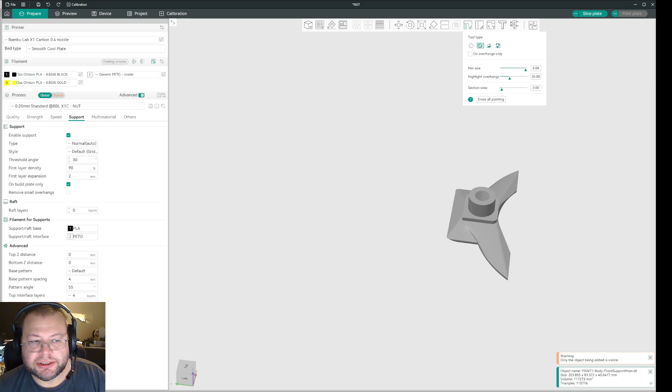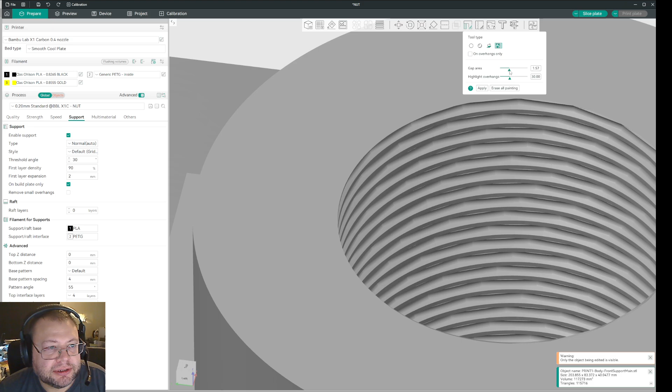Just wanted to show you a little bit, because you have a button here called gap fill, and this will basically try to detect gaps, or as you can tell from the icon, probably triangles, and it will usually do this by trying to find something that corresponds with those values, but that's not what I primarily was going to show you.

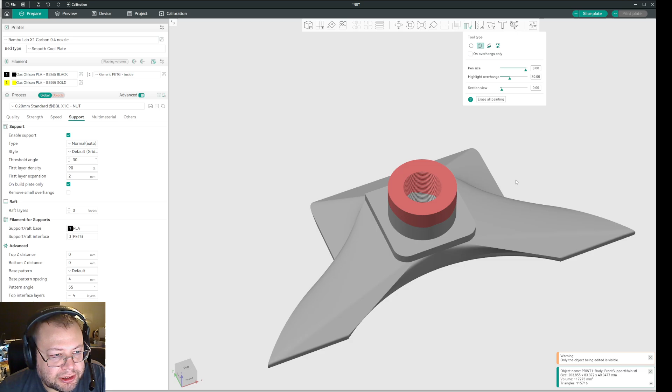I sort of made my paint process a little bit faster. So I use sphere and I put it on max, and right click is block everything. So I start with that as a point. I just go in and I paint the whole model as a block with the sphere tool.

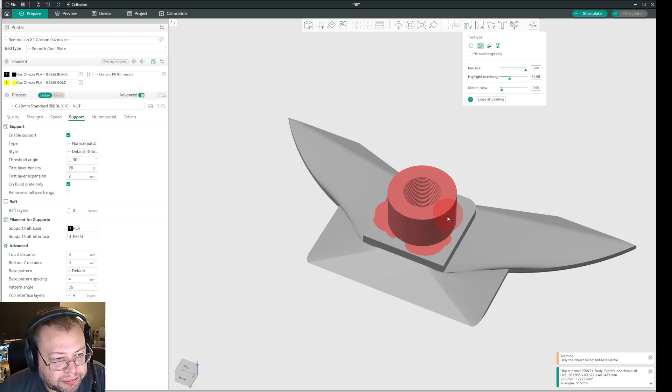Especially on models where you have threads, it is a quick way to do it. See? So now I have effectively blocked all supports inside the threads. I'm just gonna paint the whole model with block support. See? Because I'm using this sphere tool, it will do every crevice and stuff like that as well. Here.

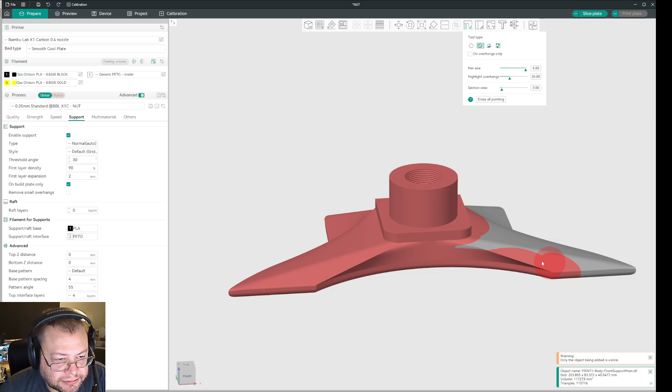The reason I'm doing this is because it's so much easier afterwards to just paint where you want the supports, and everything else will have basically block support on them. So if you at any point want to flip it or whatever, then you don't have to worry about painting blocks of support. And the green you can see here is actually the surface that is basically touching the build plate.

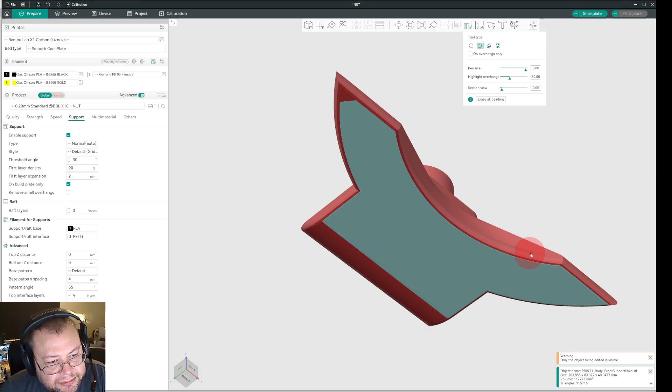I think we are getting close to the final. Okay, so there I have painted the whole thing with block support. For me that is ideal because I don't end up with random supports coming here or here, since I know it can print properly.

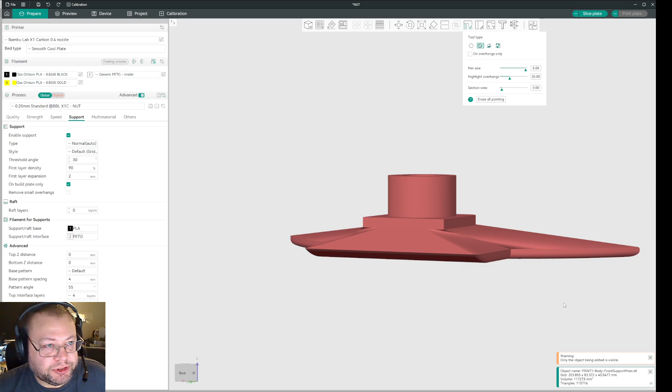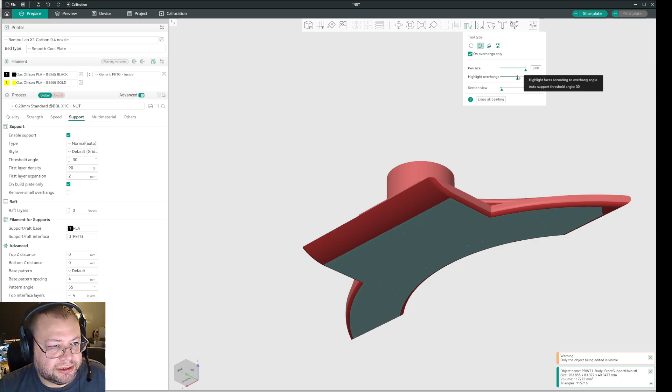So after I'm done with that, I click to the fill tool and overhang support, or I can just use the sphere tool still, and I can just leave the pen size up, it's not a problem, and then I just reduce and I increase the support until I reach the desired height. I want it to support up to there. I'm looking at the bottom part here now.

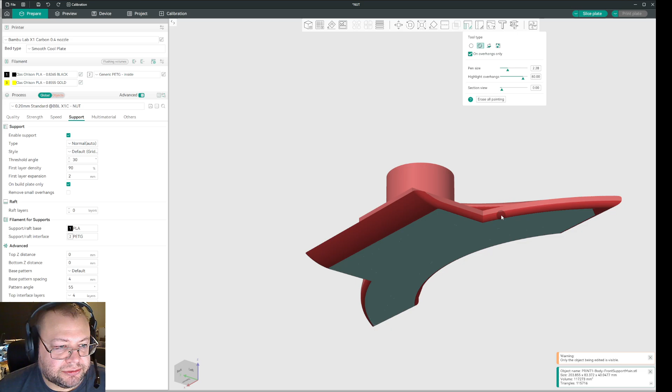Okay, so I'll reduce the size of my sphere so I'm not accidentally drawing anything else. So now I have it set to overhangs, and the sphere is roughly the size of my object here, and I think I'll reduce the overhang a little bit because I don't want to reach the top there.

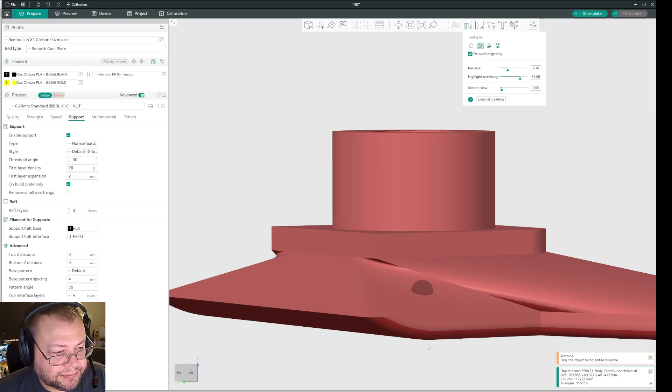You see, how far can I go? I think there should be fine actually. There, I think that's fine. I'm pretty sure it's able to print that. Okay, so now I have selected the areas here, so I'll just start painting, and I have it selected on overhang, so it doesn't matter if I paint the other pink parts.

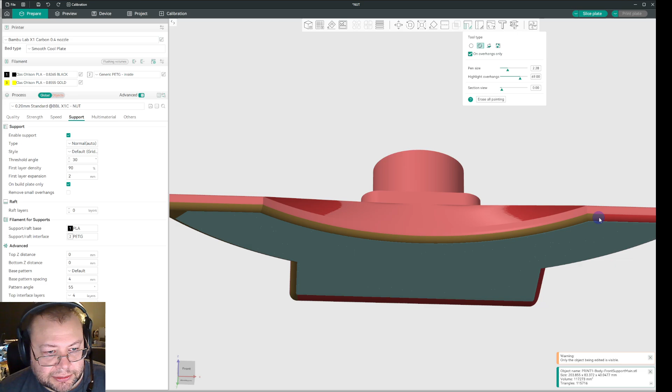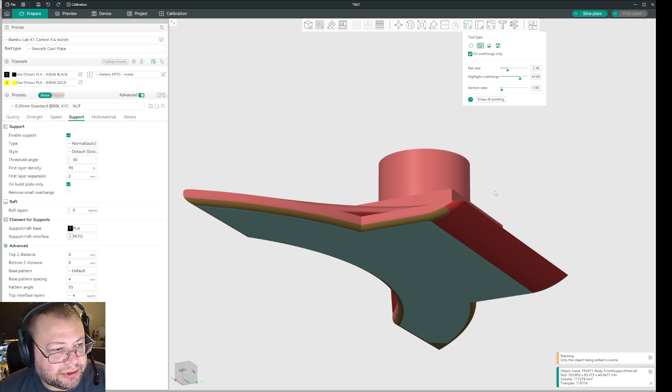Now I'm left clicking to paint the actual supports. It's only the areas that are marked as overhangs that I'm painting now. And since I'm using the sphere tool, it will not be just a small dot, it will be a three-dimensional marking of the round edge. There. Because I have blocked support elsewhere, basically it's only what I'm painting now that will receive the supports. Okay.

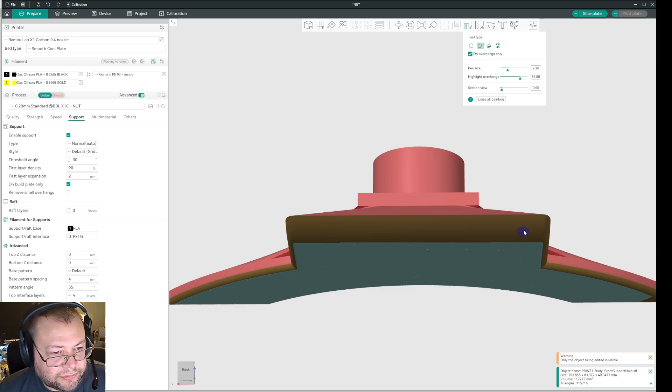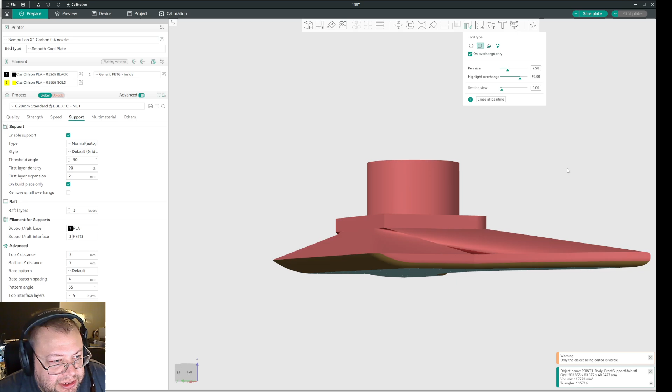The advantage of this is if I use PETG as a support interface here, then I get really smooth edges, even though the overhangs are kind of drastic, because I will put a zero Z distance, so it will basically squash it flat on every layer, and it will be pretty much perfect. Okay, so I'm pretty happy with that.

And before you close the drawing tool, you just drag down the overhang, and then you can see everything in green is perfectly painted for supports. I see there is a bit here. I'll see if I can paint that. It's like small edges. Just go around, make sure there are no gaps.

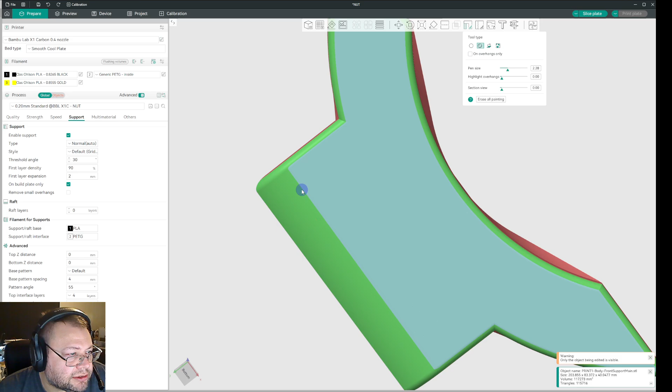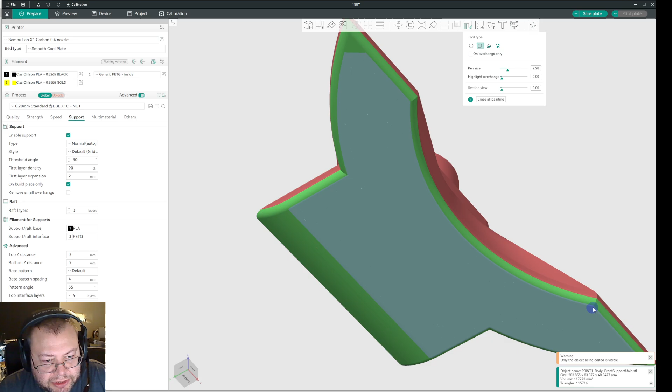Now I'm not painting overhang, so you have to be careful where you're placing it, and I'm just painting exactly on the border to the build plate to make sure that the build plate is getting proper coverage of supports.

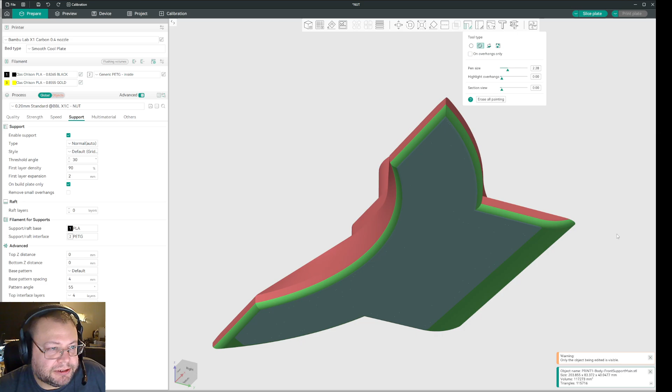And there you have it. Perfect supports. And again, for me, that works well by just blocking everything. Now I don't have to fuss with the threads and everything, and it will be printed facing downwards.